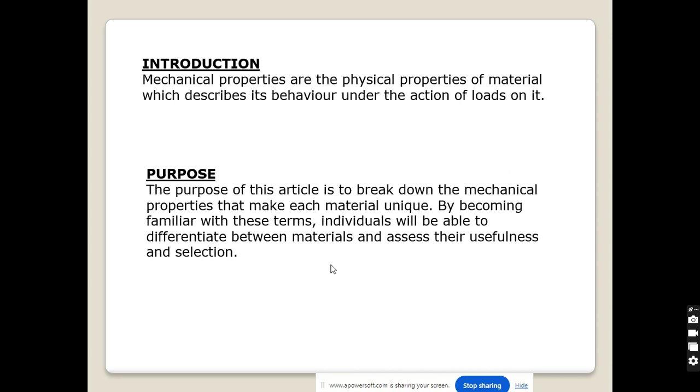Mechanical properties are the physical properties of the material which describe its behavior under the action of load on it. Every material will have its unique property which is not found in other materials. For example, cast iron or iron can be rusted, but compared with aluminum, it won't rust. Aluminum has good electric conductivity. So every material will have its own specific and unique physical properties.

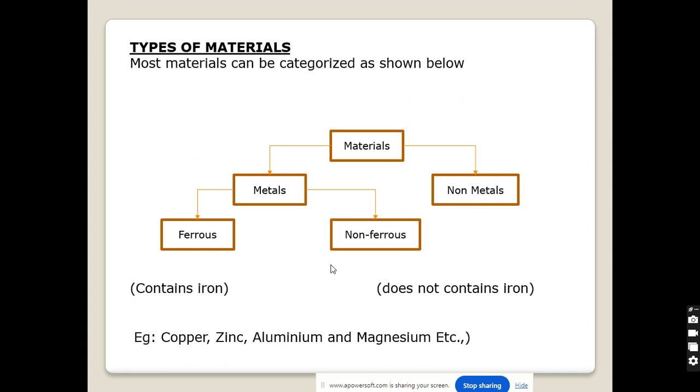Types of materials are mostly categorized as metals and non-metals. Under metals, ferrous and non-ferrous. Ferrous are the metals which contain iron. Non-ferrous are the metals which do not contain iron, for example copper, zinc, aluminium, magnesium, etc.

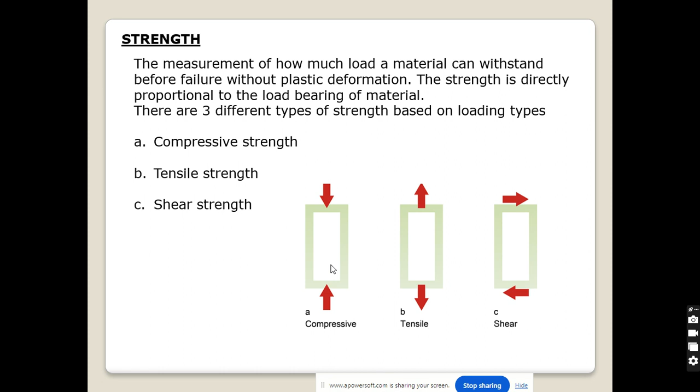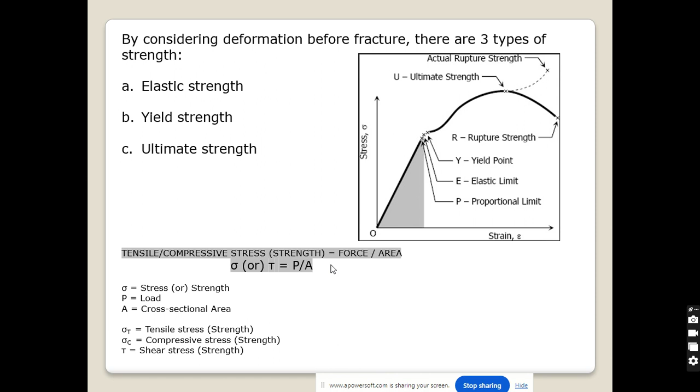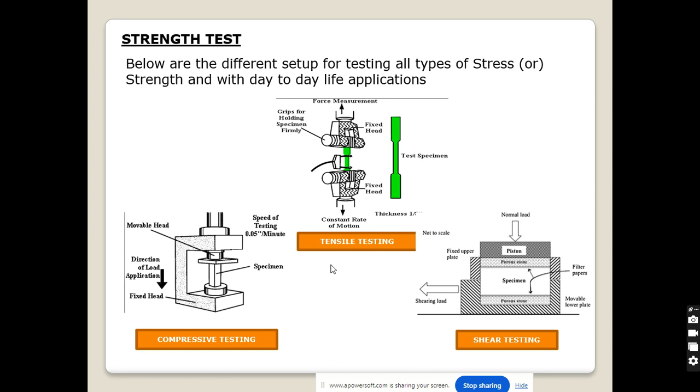These stress strain diagrams give the graph for any material, how it behaves with respect to the load application. The strength can be calculated using the force and area formula. Below is the machinery which will be useful for tensile, compressive, and shear testing.

Fatigue strength. Fatigue means the amount of cycles a material can withstand under fluctuating stress or cyclic loading upon reaching failure. The best example is when we hit something with a hammer, as we apply continuously, after some 50 or 25 cycles the material will break, correct? That means cyclic loading. This is also a mechanical property a material should have.

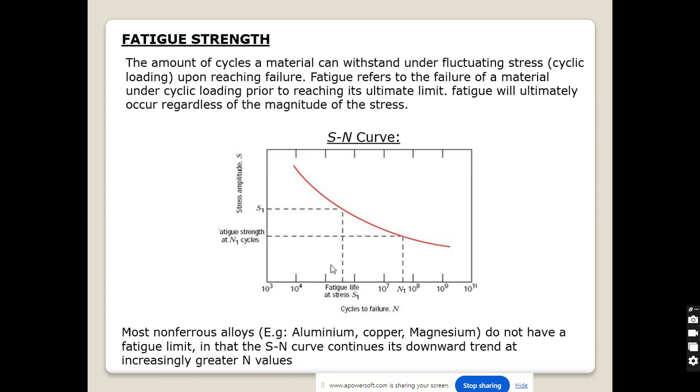This can be represented in this S-N curve. The fatigue strength can be tested in the rotating bending test machine.

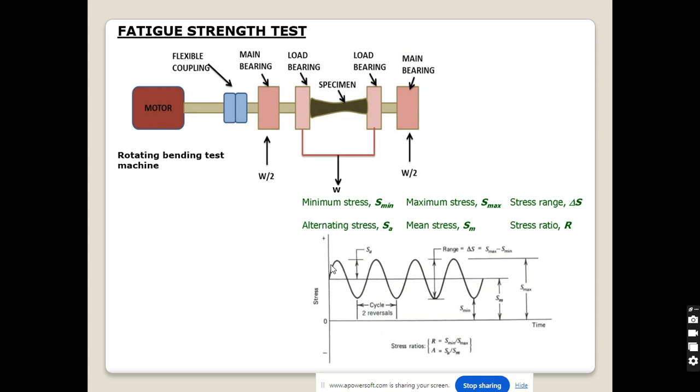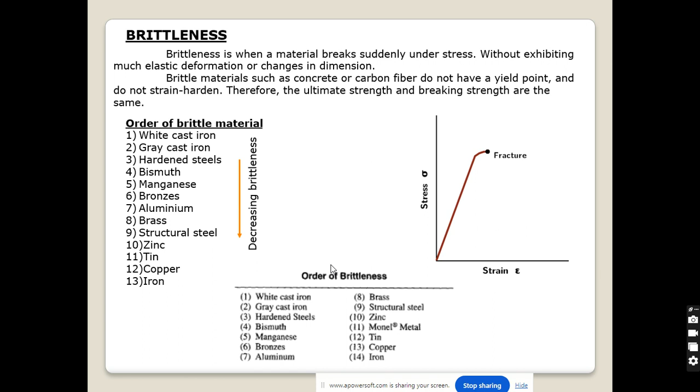Brittleness. Brittleness is the property by which a material breaks suddenly under stress without exhibiting any elastic deformation or change in dimension. Means suddenly it will break. For example, glass, correct? All brittle materials are shown here. Brittleness is tested with the Charpy V-notch test.

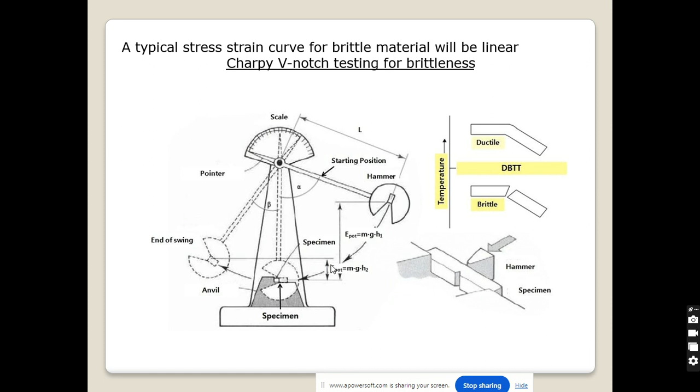Stiffness. We should be very keen on understanding strength, stiffness, and toughness. Don't be confused by these three mechanical properties. Stiffness is a material's ability to resist significant elastic deformation while loading. The less deformation a material exhibits during loading, the stiffer it is.

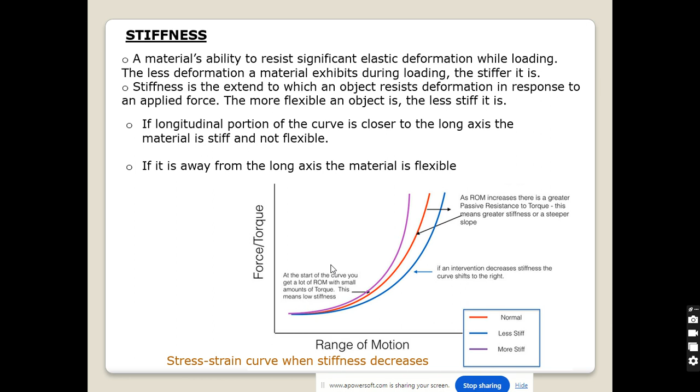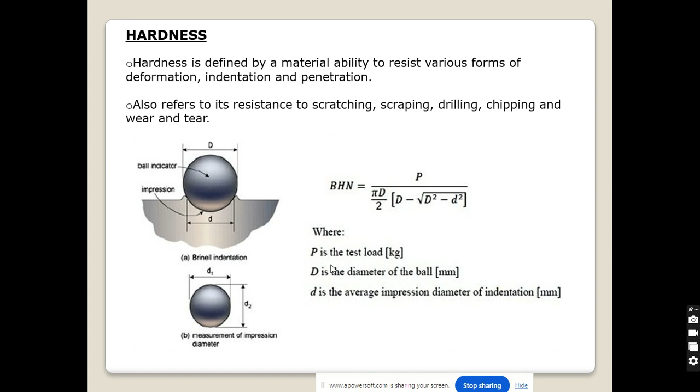Hardness. Hardness is the property defined by a material's ability to resist various forms of deformation, indentation, and penetration, which also refers to its resistance to scratching, scraping, drilling, chipping, wear and tear. Meaning if you want to strengthen the surface, we increase hardness. These are Brinell hardness tests which determine how much hardness a material has.

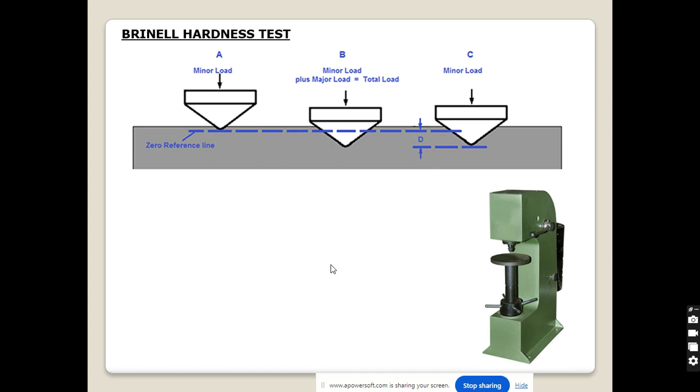Toughness. Toughness is defined by a material's capacity to withstand elastic and plastic deformation without failure. It is typically measured by the amount of energy the material can absorb before fracturing.

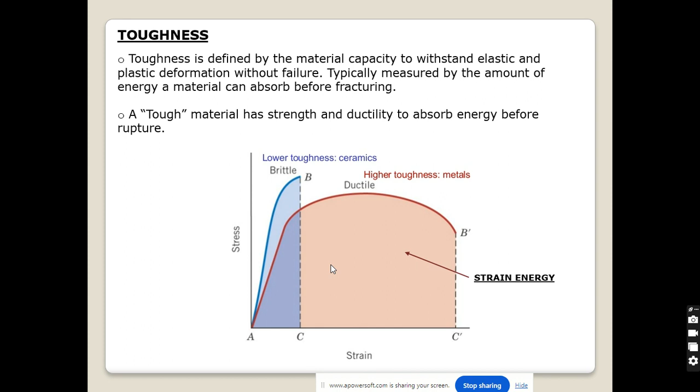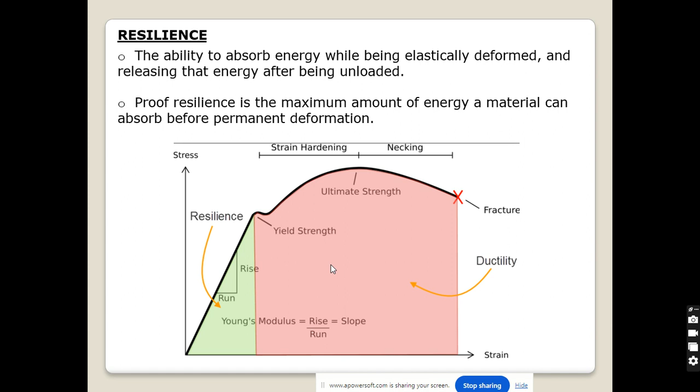Resilience. The ability to absorb energy while being elastically deformed and release that energy after unloading. This is the point where we consider it under elastic deformation, but the thing here is absorbing the energy. Springs are materials where we can see this resilience and energy storage with load and unloading application.

Ductility, yes, probably everybody knows about the material and its mechanical property, but we won't be aware of this property. Ductility is a measure of a material's ability to undergo significant plastic deformation before rupture. So if you want to make wires or rods, something with a reduction of the diameter, length, or cross-sectional area, then we'll pick materials which have ductile mechanical properties.

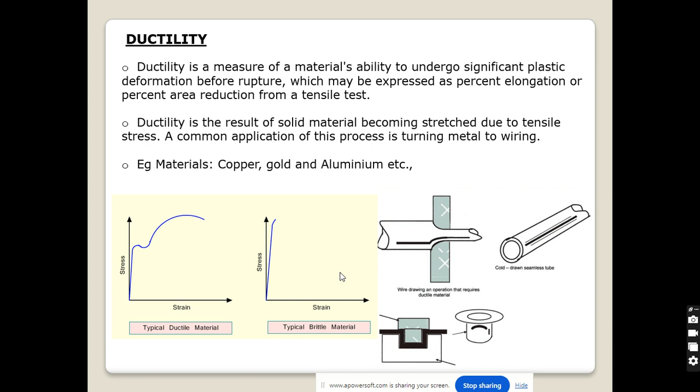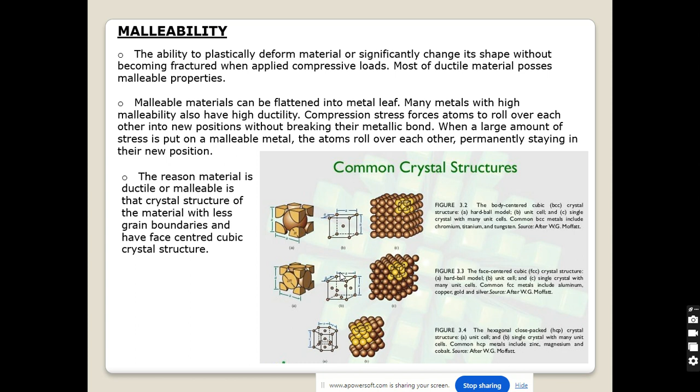For example, we can consider copper, gold, aluminum, and the pictures show how they're used. Malleability and ductility both seem the same, but ductility is useful for drawing wires, while malleability is used for drawing sheets. This is the difference.

Creep. This is also a very good mechanical property. Creep is a slow and gradual deformation of a material under a certain applied load, measured by the influence of time and temperature. This is a property where the load is applied and left for some time with some temperature. Then after some days of time and temperature, due to this property, the material will fail.

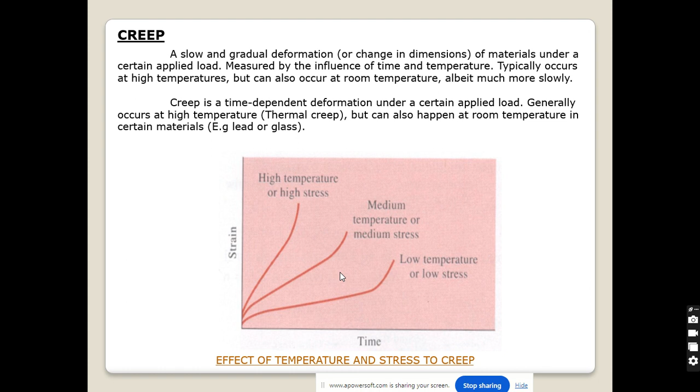This property also means whenever we have some application where load is continuously applied, and due to some abnormal circumstances like time or temperature it might fail, in those circumstances we need to pick a material whose creep property is good enough.

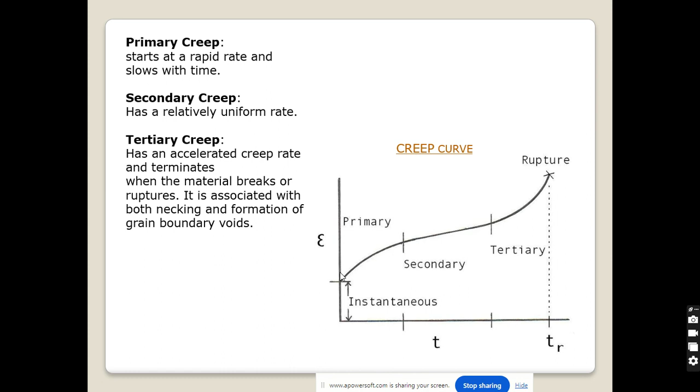In creep we have primary, secondary and tertiary creep. Primary creep starts at a rapid rate and slows with time. Secondary creep has a relatively uniform rate. Tertiary creep has an accelerated creep rate and terminates when the material breaks or ruptures. It is associated with necking and formation of grain boundary voids.

Machinability. This is also a very important property for any material. It means how easily a material can be machined. Due to this, if it is hard enough and machinable, some materials will be useful for tool purposes as well, as they have good strength for machinability.

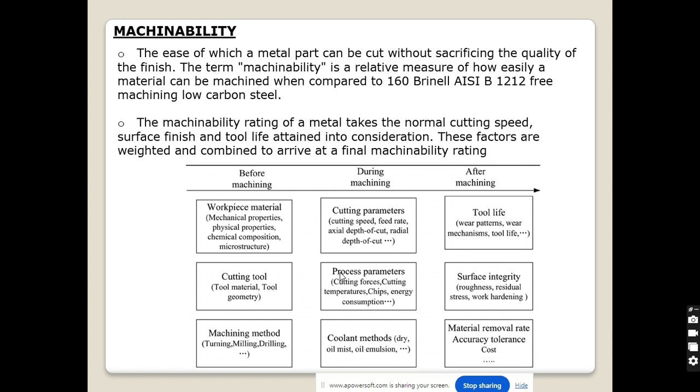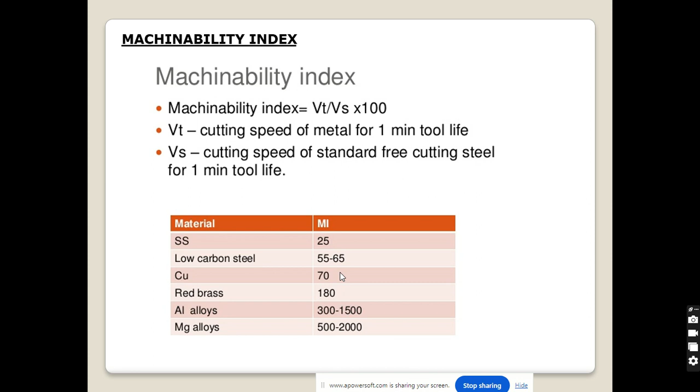Damping. Damping refers to dissipating the amount of energy used to create vibration, oscillation, or stress. A material with a good damping property such as cast iron is capable of absorbing high amounts of vibration. A large damping capacity is desired for materials and structures where unwanted vibrations are induced due to operations, such as machine tool bases or crankshafts.

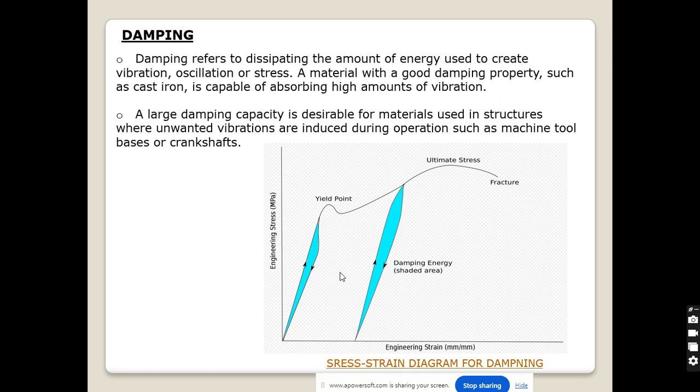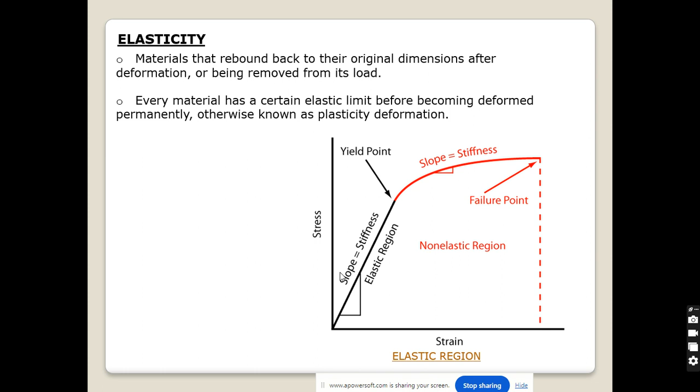Elasticity. Material that rebounds back to its original dimension after deformation or being removed from its load. Every material has a certain elastic limit before deforming permanently, otherwise known as plastic deformation. So the red line is the utmost point of a material. After that, it will be plastic deformation. Before that, it will be the elastic region. Plasticity, a type of permanent deformation that occurs under stress before resulting in failure.

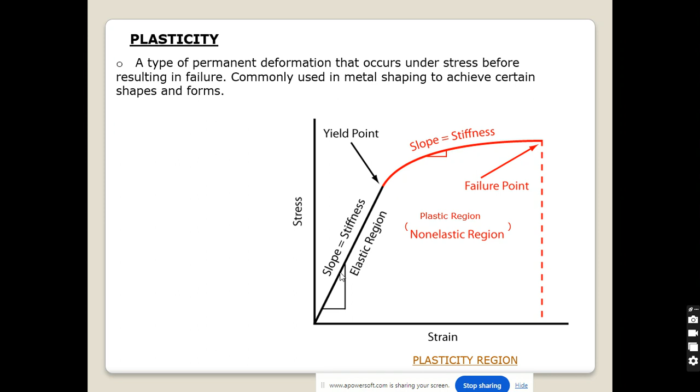These are material and mechanical properties like homogeneity and anisotropy. Homogeneity: any material that has the same properties throughout its entire geometry. Homogeneous material cannot be mechanically separated or identified individually. Certain types of homogeneous materials include plastics, metals, glass, paper, resin, coatings.

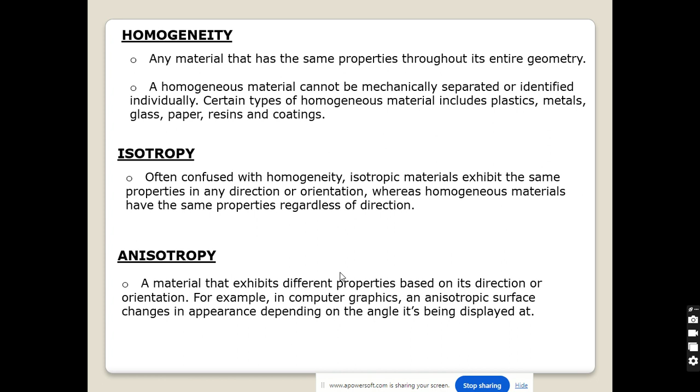Isotropy is often confused with homogeneity. Isotropic materials exhibit the same properties in any direction or orientation, whereas homogeneous materials have the same properties regardless of direction. Anisotropy, a material that exhibits different properties based on its direction or orientation. For example, in graphics.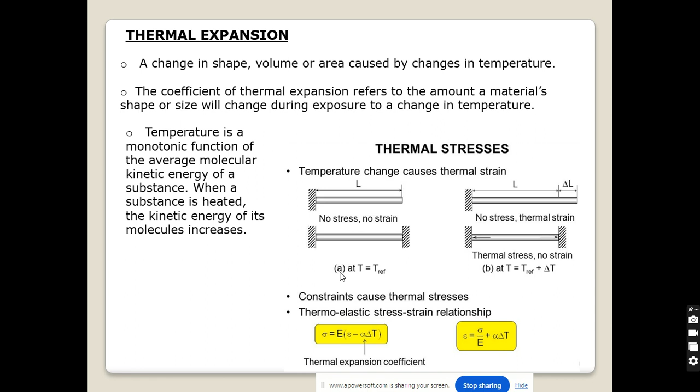Thank you. Hope these mechanical properties will be helpful for understanding your mechanical material selection. Hope it gives you some idea which will be helpful while designing something for your robust and good design.